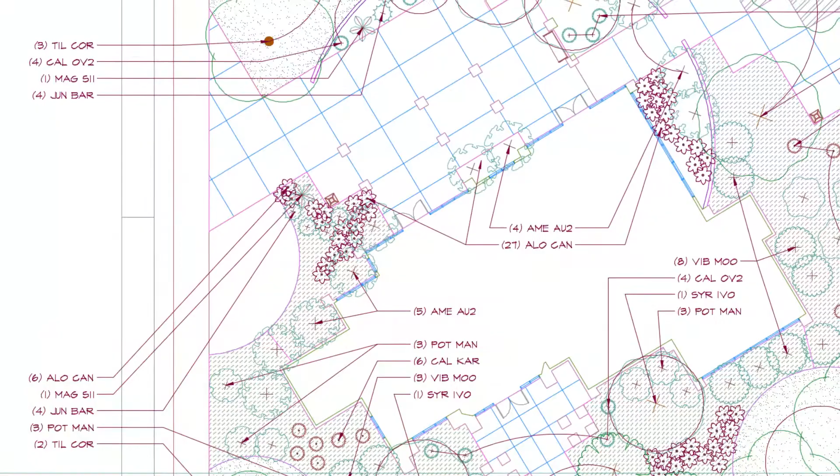Drafting efficiently doesn't mean you're clicking faster, but instead taking fewer steps while being more accurate. Verify labels can make sure your plan is perfect, but how about getting those labels down in the first place? Let's look at some advanced labeling techniques to up the efficiency and get to this everything's-labeled message faster.

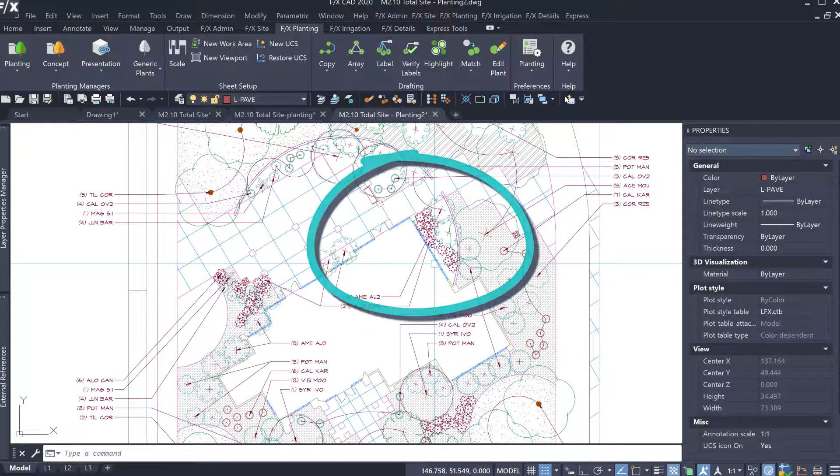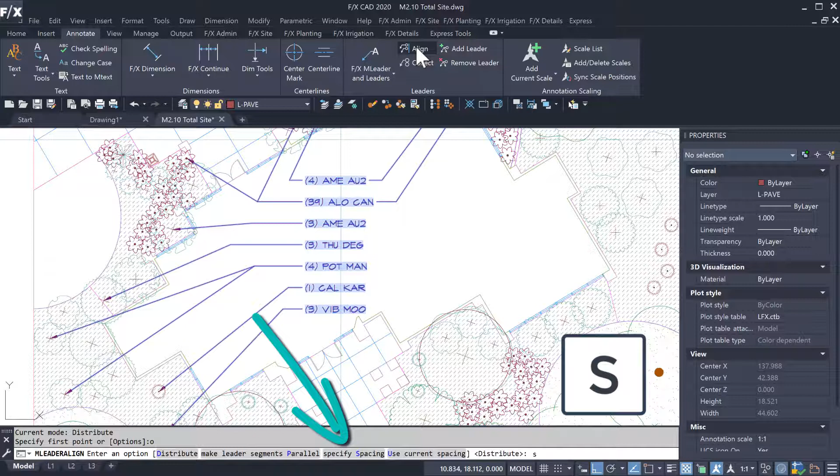With Multileaders, it's easy to align labels vertically, but there's more here in the options. You can distribute, or set a desired spacing, or pick a consistent leader angle.

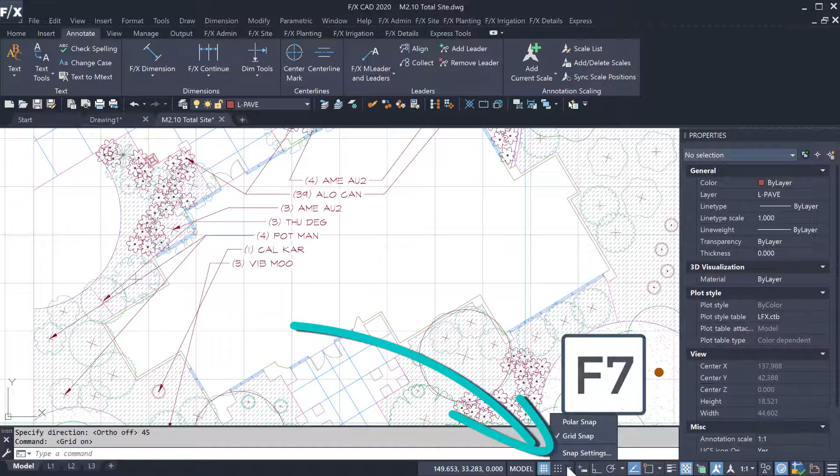But if you want to remain evenly spaced the whole time you're labeling, grid spacing is still a great method. Tap F7 to turn on the grid, and adjust the spacing by going to the grid snap icon at the bottom of the screen, opening the snap settings, and changing the grid spacing and snap spacing to what you need.

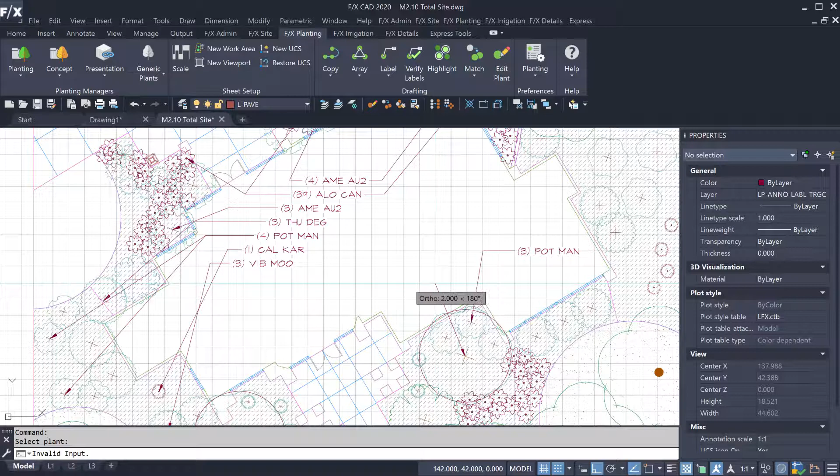Label and tap F9 to turn on your grid snap. It's now easy to align the drop points for your labels. Remember that with Multileaders, you can just pick up and move your label using the grips if you mess up. Hit F7 and F9 to turn off the grid when you don't need it.

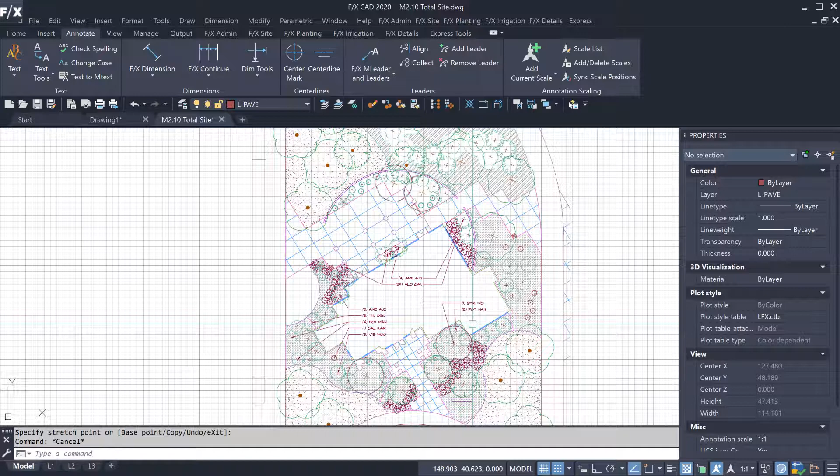That's looking good, but I still have a lot to label. I need a plan to make sure I'm labeling smart and using as few group labels as I can. Here's where you can use the Highlight tool to guide your labeling.

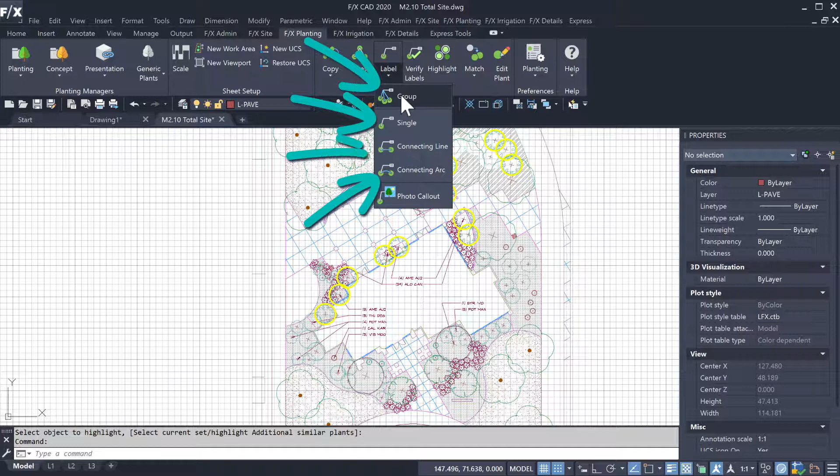In the F/X Planting ribbon, click Highlight. Select the type of plant you want to start with, and it'll circle all plants of that species. Now I can see all the groupings, and I can plan out my label types: either group, single, connecting arc, or line. After selecting the species and highlighting it, press Escape instead of right-click or Enter, and the highlights will stick around while you label.

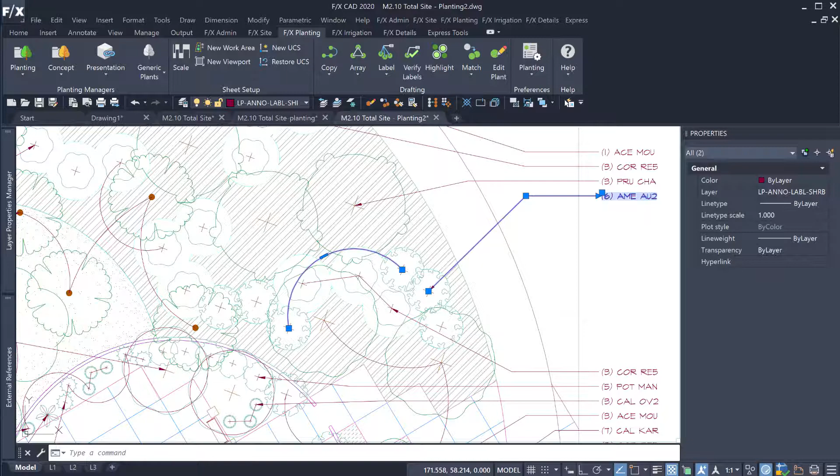Now I can see which groupings can be caught with just one label, saving me time and space on the plan. It's a lot easier to read a single label that hits a bunch of groups than a bunch of labels for each group. Now I'm pretty much done, but of course there are some last-minute changes to the plan.

Verify labels can pick up deletions and point out unlabeled plants. And then you can use Group Label to edit existing labels to pick up those stragglers.

In the command line, you can see that choosing a label to modify is one of the options. So, select a label. If you can pick up the plants with an enclosing rectangle, just click the first and last point. If you need to snake around some other groups of the same species, use Polygon.

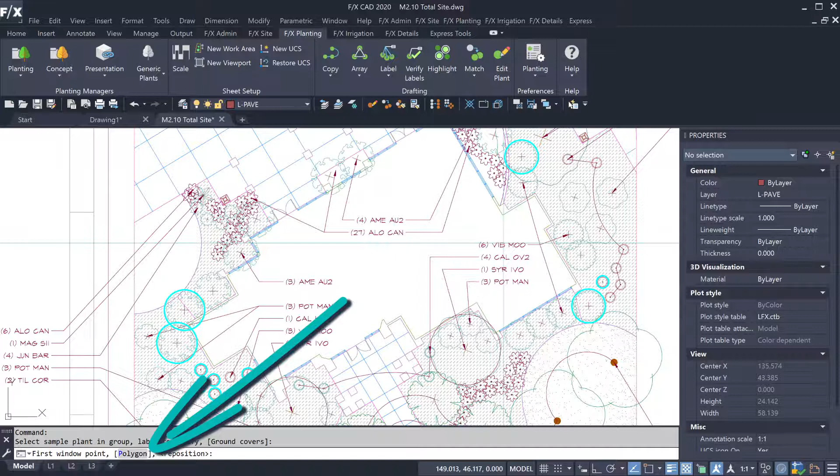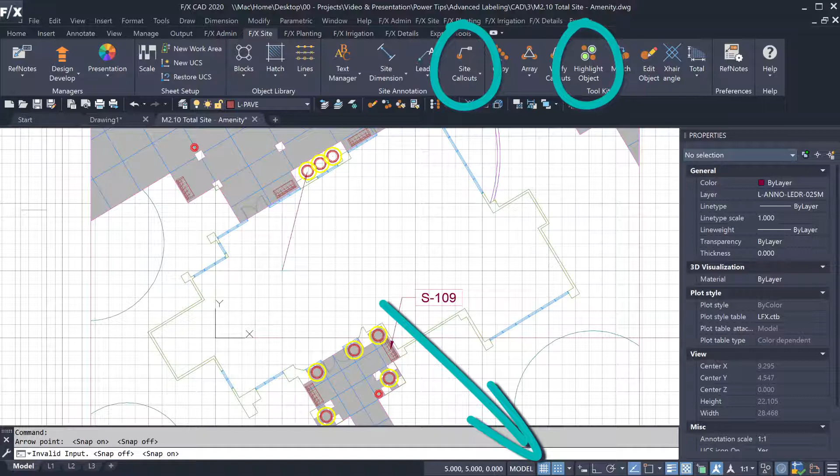Now it's perfect again, and you didn't need to relabel or count anything. You can use these same techniques with your RefNote callouts too. Remember that you can right-click on a multi-leader to choose to add another leader line if you need it.

It's time to shine with these tips. Try them out and share any more that you find on our community forum.